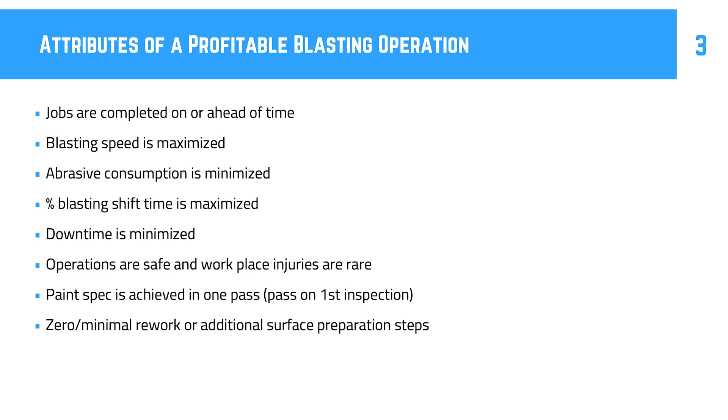So the objective of blasting is to accelerate abrasive particles to a very high speed to perform the work of cleaning and preparing a surface for coating. That high particle speed is an energy state, and that energy is imparted to the surface when the particles collide with it. All of the mechanical energy for blasting is provided by the compressor motor. The compressor raises the pressure of a specified volume of air. The energy of the air is essentially just the pressure multiplied by the volume. So in other words, pressure is mechanical energy of the air per unit volume.

So viewing pressure as mechanical energy, thermodynamics says that once the compressor has raised the pressure and the air exits the compressor, the energy can only decrease from there. Ideally, all the energy from the compressor would be used on the surface. The problem is that everything in between, the hoses, the fittings, the bends and turns, the dryer and the pot, all contribute to expending the mechanical energy of the air before it reaches the nozzle. Since energy is pressure times volume, and the volume doesn't change much from the compressor to the nozzle, the energy expenditure through the system shows up as pressure reduction.

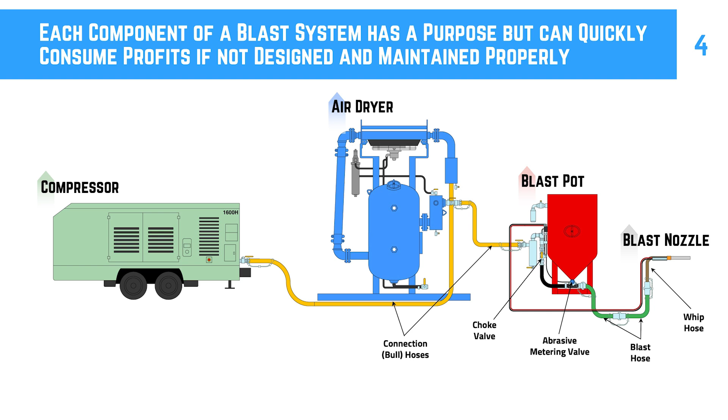Everything that resists the flow of the air through the system reduces the pressure and decreases the efficiency of blasting. It's the pressure at the nozzle, not at the compressor, that matters in blasting. And it may seem like paying attention to the details along the way to minimize these losses would offer maybe marginal productivity gains, but that couldn't be further from the truth. Surprisingly huge improvements in productivity and profitability are possible, and most times with little or zero capital investment. As we just said, the compressor is the engine of blasting.

It has to have enough capacity in both pressure and air volume to generate a productive pressure at the nozzle. And that's accounting for all the losses along the way and accounting for the number and sizes of the nozzles being used. Undersized compressors is one of the major limitations that we see in both large and small blasting operations.

The compressor should be sized for the maximum expected number and size of operating nozzles and the desired maximum pressure at those nozzles. We recommend compressors with a maximum pressure of at least 150 psi to allow for setting the compressor between 140 and 150 and to ensure that pressures well above 100 psi at the nozzle can be achieved when needed, provided the rated CFM is also high enough.

You can always set the compressor lower if lower pressures are needed, but you can't set it higher than its maximum when the additional pressure can make all the difference. And next is the maximum flow rate of the compressor, or the CFM. The rated flow rate should take into account all air demands, including the nozzles, breathing air, and any other loads that the compressor needs to supply.

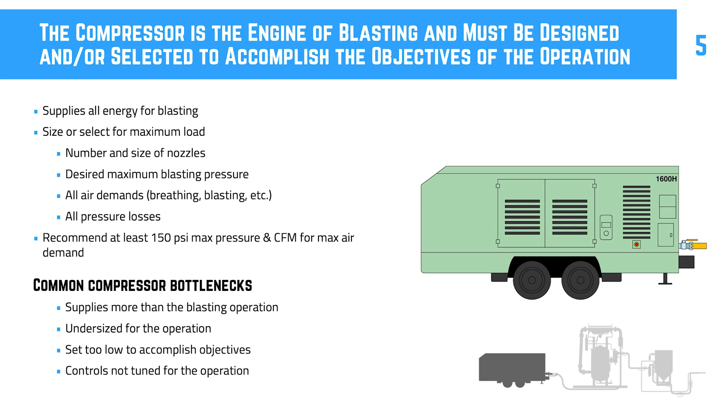The air that comes out of the compressor has moisture in it, and that moisture increases in high humidity environments. Moisture separators on compressors and pots help, but they can't be counted on to keep water from combining with abrasive, accumulating in the pot, and also reaching the nozzle and the surface that's being blasted.

Moisture that reaches the pot and mixes with abrasive can substantially limit the uptime, productivity, and profitability of blasting. Wet abrasive in the pot can cause the abrasive to agglomerate and stop flowing through the metering valve. And there's often downtime to clean the pot and refill with dry abrasive, sometimes repeatedly.

The moisture that reaches the nozzle with the abrasive creates a film on the surface that traps abrasive residues that would otherwise have been blown away with dry air. And those residues can cause rapid rust bloom and the need to reblast before coating. Rework is an enormous and unnecessary cost that expands schedules and just kills profitability.

The moisture on the surface will evaporate, but the residue will be left behind, and it can decrease the coating quality, the coating performance, and ultimately affect the service life of the asset being blasted. So in other words, air dryers are worth their weight in gold. You want to blast with dry air.

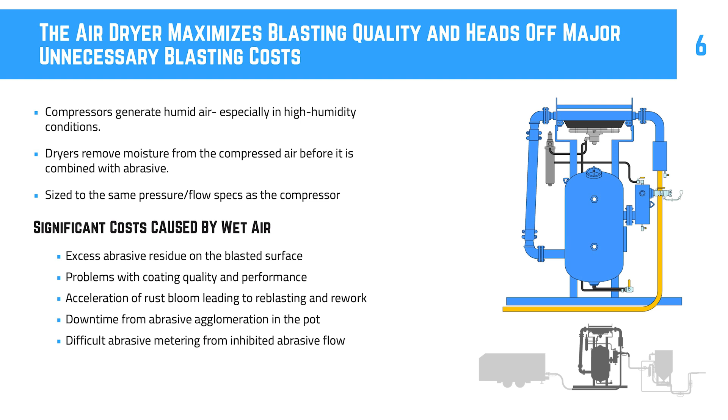We recommend deliquescent air dryers rated for the same volume and pressure as the compressor in field operations. And we find that the refrigerated air dryers that come with central compressors in blast booths work just fine. They work very well. So many of the problems that limit productivity and profitability in blasting operations occur in the pot assembly. The pot works by splitting the air from the dryer in two ways.

A small amount of air flows into the pot to keep it pressurized, and the rest of the air is routed to the bottom of the abrasive metering valve at the bottom of the pot to receive abrasive and be transported through the blast hose to the nozzle.

The key in all of this is that the pressure inside the pot on the inlet side of the metering valve is nearly the same as the pressure in the air line that passes underneath the pot at the outlet of the metering valve. Those pressures need to be the same or really close, because metering valves are designed essentially for gravity flow of abrasive. Anything that upsets this balance of pressure on either side of the metering valve can wreak havoc.

And as an example, air leaks in the pot through fittings, the ball and port seals, or any other leak will tend to decrease the pressure in the pot above the metering valve on the metering valve's inlet side. So the pressure is lower there.

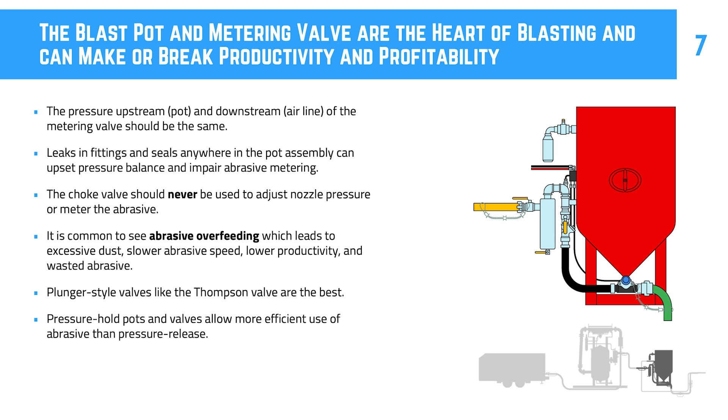Abrasive flow through the nozzle should be adjusted using the metering valve with a properly sealed pot. Leak checks and repairs should be done regularly, if not daily. A blasting operation with a sealed and properly functioning pot will be far more productive and profitable than one with a leaky and malfunctioning pot.

So hoses can gobble up pressure, especially when they're not sized properly. The inside diameter and the length of hoses essentially determine what the pressure loss will be for a given airflow and air pressure. There are three types of hoses used in most blasting systems. The connection hoses, or bull hoses, connect the compressor to the air dryer and the air dryer to the pot, and have to be sized for all downstream air demands. If you've got 4 nozzles downstream, then the bull hose needs to be able to accommodate the airflow for all 4 nozzles with minimum pressure loss.

Hose length, bends, and loops also cause additional pressure loss, so it's best to locate the compressor, dryer, and pot close to one another so that bull hoses are as short as possible. And the same goes for blast hoses. They should be sized for the maximum expected air demand or the largest expected nozzle and the highest desired pressure at that nozzle. A rule of thumb is that the internal diameter of the blast hose should be at least 3 times the diameter of the nozzle orifice. So for a number 7 nozzle with a 7/16 inch orifice opening, the hose should be about 21/16, or about 1 1/4 inches.

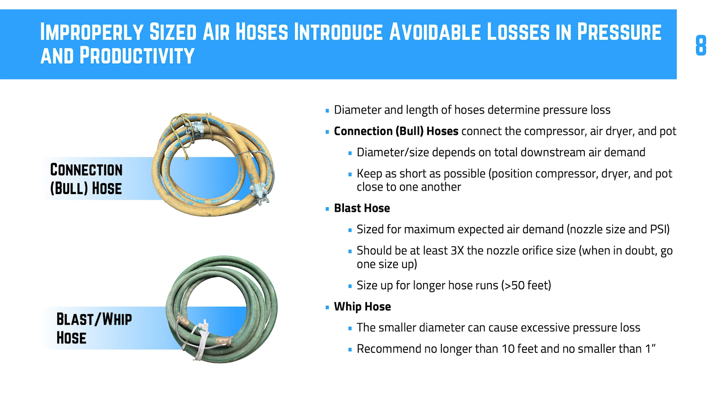Most nozzles on the market work just fine to accomplish the objectives of blasting. Standard Venturi nozzles provide a nice balance of particle speed for cutting and particle spread for a nice wide blast pattern. Longer nozzles like the XL prioritize speed over spread and are very effective on thicker, more difficult coatings where cutting speed is most important.

Nozzle sizing and the selection of nozzle size is driven by the size and substrate that you're blasting and the capacity of the compressor. And we often see blasting operations that are using nozzles that are either too large for the given capacity of the compressor or so worn out that the orifice opening is 1 or even 2 sizes larger than it's supposed to be.

Generally, we recommend using the smallest nozzle necessary for efficient blasting because this minimizes fuel, air, and abrasive usage. However, larger nozzles are way more productive on large surfaces like ship hulls and tanks.

In those cases, we recommend the largest nozzle that the compressor can handle and to keep the pressure at the nozzles above 100 psi. We actually prefer 110 psi at the nozzle for our abrasives. And the nozzles should be gauged weekly at a minimum and replaced if the orifice is 1/16 inch larger than its original size.

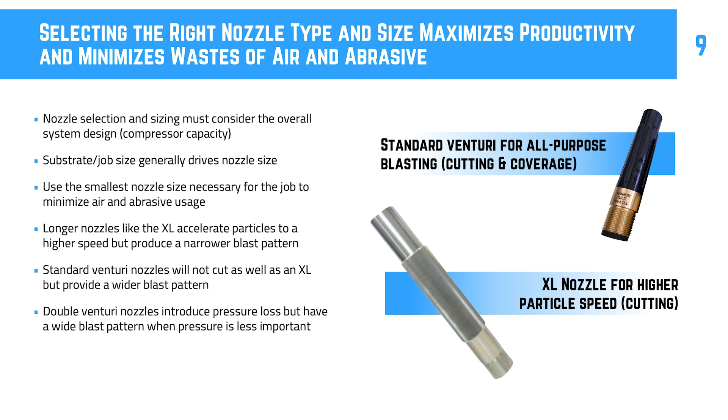So now we're going to talk about the blasters. Blasting is a tough job. I have great respect for blasters. It's complex. It's done in God-forsaken places. It's exhausting. And it takes serious attention to detail to accomplish the specs of a job.

And we're often surprised to see nearly identically designed blasting systems where one of them far outperforms the other. In many of these cases, it's the skill of the blasters that accounts for the difference. Now, it wouldn't be fair to say that blasting companies are not aware of the importance of training blasters, but I think it might be fair to say that the potential impacts on productivity and profitability are underestimated.

They use their body weight to support the nozzle and move the nozzle with their shoulders as fast as the abrasive will allow them to go on a given coating. These guys understand the interplay between pressure, abrasive metering, and nozzle distance and angle with the surface. For example, when a particular area is difficult, they'll move the nozzle in closer. When it's easier, they move away for a bigger blast pattern and more coverage.

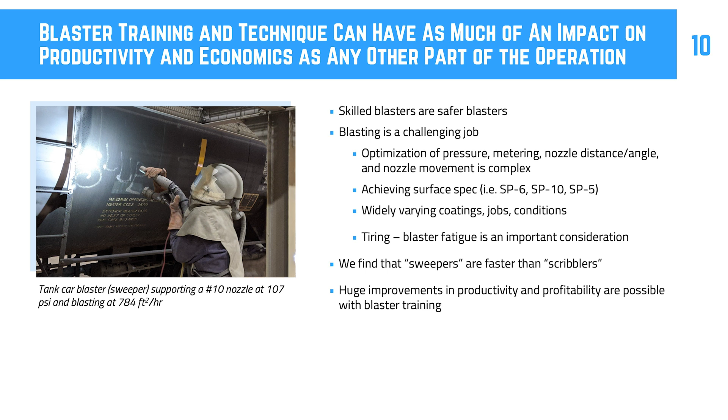Much of what we have talked about can be measured and tracked. It's extremely important to know the idle pressure at the compressor or where the compressor is set, and the pressures under full load with all nozzles turned on at the compressor, the pot, and the nozzle.

The pressures at the pot and nozzle can be easily measured by inserting a needle gauge into the blast hose near the pot to get the pot pressure or close approximation, and in the blast hose near the nozzle to get the pressure that's actually at the nozzle, your working pressure. It's also of paramount importance to record all pot refills to track abrasive usage over the course of a job.

If nozzle timers are used, which we love to see, then the operation will know how efficiently time is being used and can correlate pot refills with nozzle time to calculate abrasive flow rate through the metering valve from the pots. And productive output, whether that's rail cars or square feet on the hull of a ship, should also be tracked per nozzle on a daily basis.

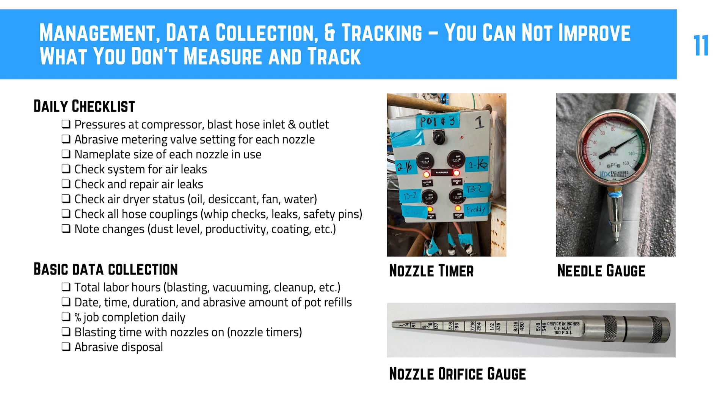So, like a lot of things in life, this continuous improvement we've been talking about in blasting comes from consistent attention to and correction of what may seem like little things, but they add up to more than we might have imagined. To illustrate this, we created a basic financial model of a blasting operation that accounts for revenue, in this case at a bid price of $3.50 per square foot, and the costs of the abrasive, labor, compressor fuel, cleanup, and disposal. So the profit in this model is just the revenue less the sum of those costs.

We'll assume a base case where 8 blasters are doing a 50,000 square foot job with 90 PSI at the nozzle and 100 square foot per hour blasting speed. These numbers correspond pretty well to a lot of large tank jobs, tank liners, and the base profit margin here is 31.5%.

So for case one, let's assume that the compressor is set 5 psi higher, and some hoses were right sized to accomplish a total of 10 more psi of pressure at the nozzle. With the additional pressure, the metering valve could be turned down 10%. So you got 10% less abrasive flow. Just that increases the profit by 36%.

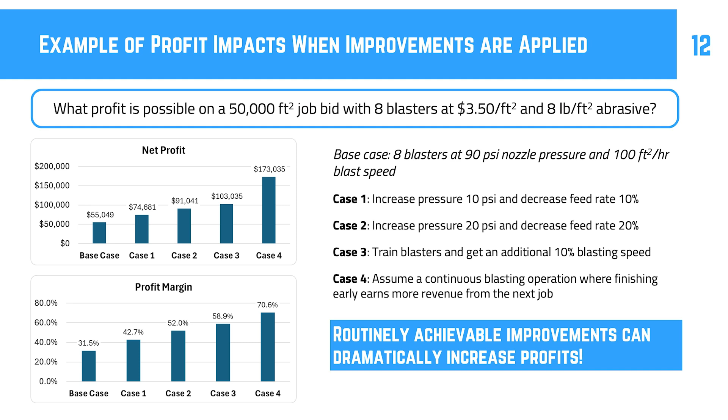We had a lot to learn when we started this business. We didn't know what we didn't know when we first started. But in trying to help our customers get the best possible results, we had to learn it. And what we learned is that you need to do these things. And if you do these things, magic can happen.